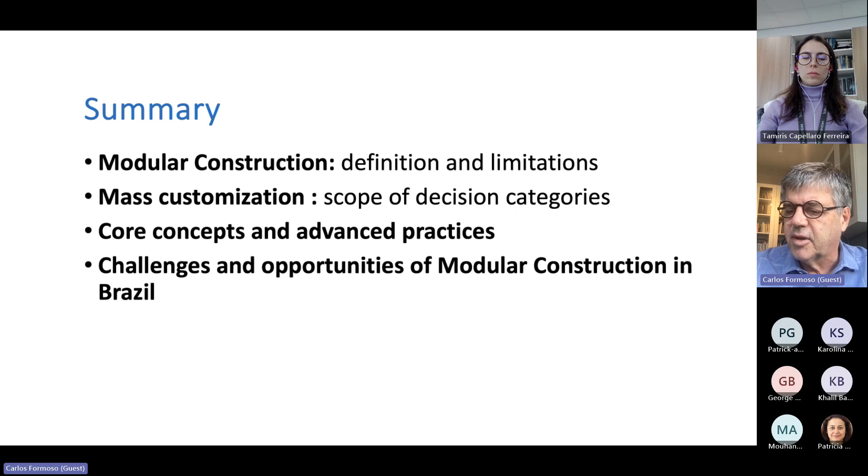So what is modular construction? Everybody thinks about volumetric modules that are fully produced in a manufacturing plant, right? A general definition of modular construction is that it's a construction process in which a large share of activities are executed off-site in a controlled environment with a high degree of mechanization.

Not only volumetric modules are considered as products of modular construction, but also panels that can be assembled on site. It's also stated that modular construction usually has a high degree of completeness before site assembly. One of the great advantages of modular construction is that the integration of components is undertaken in an industrial environment, and this is something critical when you do on-site construction.

The difficulties and problems in terms of coordination and quality arise when you need to integrate different components on a construction site where you don't have much control over processes. Of course, if we're talking about modular construction, the modularity concept should be used. Later on, I'm going to talk a little bit about this concept, which is very important for modular construction and needs to be adapted to be fully used in the construction industry.

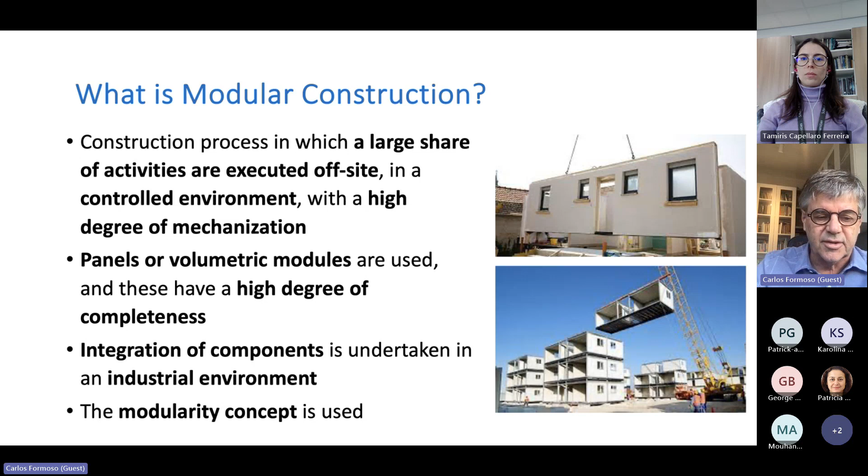Some limitations of modular construction: I have visited a number of modular construction companies in Brazil and also in the UK. What you usually see is that there is a variation in the degree of mechanization and automation. Some companies use a high degree of automation and mechanization, producing highly repetitive standardized modules, but other companies at the other extreme have a relatively low degree of mechanization.

I would say that even some successful modular construction companies produce modules in a manufacturing plant but without a high level of automation. Sometimes we say that some modular construction manufacturing plants look like a construction site with a roof, because many tasks are made by hand, not by machines.

Another interesting limitation is that the degree of completeness of modules produced in manufacturing plants also varies substantially. Even in developed countries, you see that in only some companies are a few subsystems assembled off-site. Some companies send parts to the construction site, and part of the work is assembled on site.

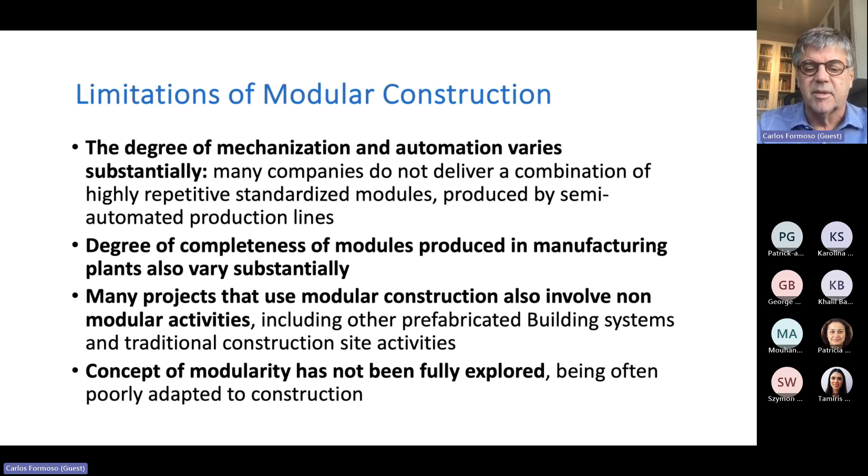Also, what we see in some modular construction companies is that the concept of modularity has not been fully explored, often being poorly adapted to construction. I'm going to talk a little bit about that later. These are some examples - in Brazil, we use a lot of wood frame and light steel frame.

These are two completely different companies. Tecverde is a wood frame company. They produce most activities in a manufacturing plant with a high degree of automation. It is a very successful company, one of the leading companies in Brazil.

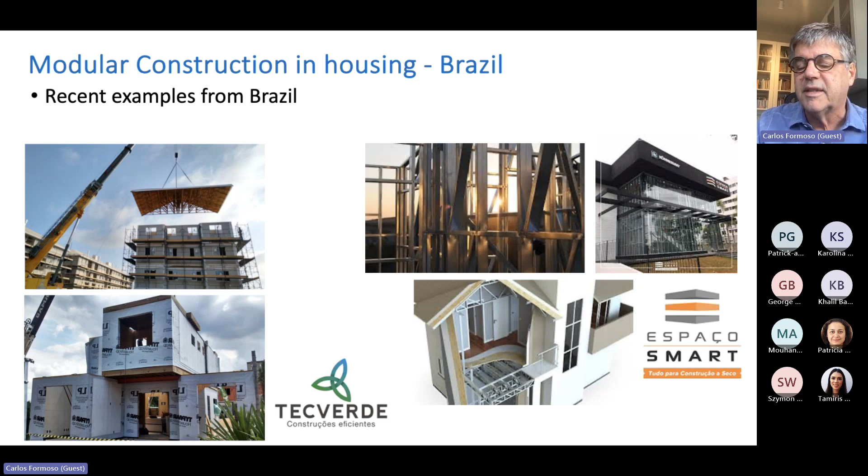The other company, Espaço Smart, doesn't send modules to the construction site. They send kits for light steel frame, roof, windows, and so on, assembled on site by qualified subcontractors. It's a kind of decentralized production system. They are also very successful. I would say they also offer modular construction, although the percentage of activities carried out in a manufacturing plant is relatively small. They operate across the whole country and even in other Latin American countries.

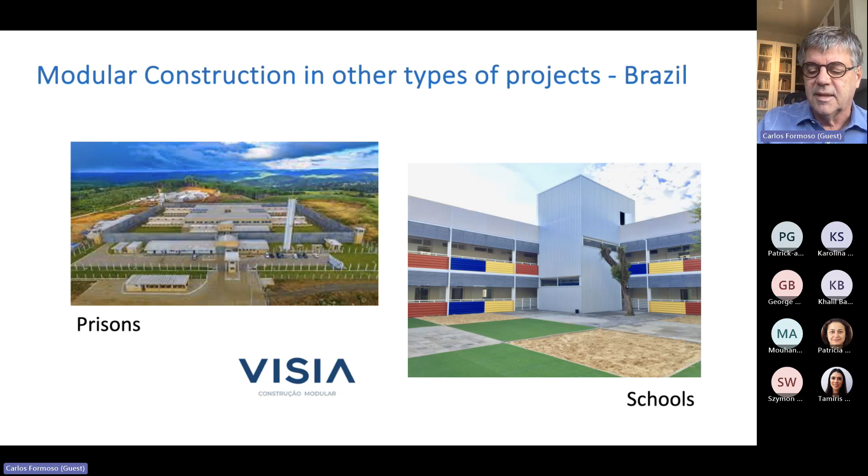This is another company. They produce a wide range of products, especially prisons and schools. I wish they could produce more schools than prisons, but prisons is one of their main businesses. This type of project usually has a very short lead time, which is one of the main advantages of modular construction around the world: delivering a project in a very short lead time.

Mass customization is something that has existed for a long time. It's when a company offers products that fulfill specific customer requirements through flexible processes and structures, within costs and delivery times similar to mass production, meaning you're able to provide some flexibility. You charge something for that, but not much more than mass-produced products. Many companies in the manufacturing sector adopt mass customization. They offer limited customization based on deep knowledge about customer requirements, based on the assumption that customers are prepared to pay a premium price for customization.

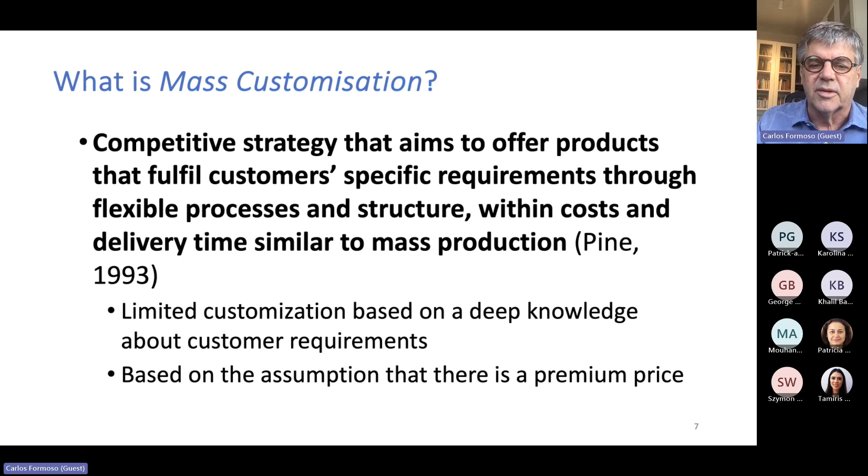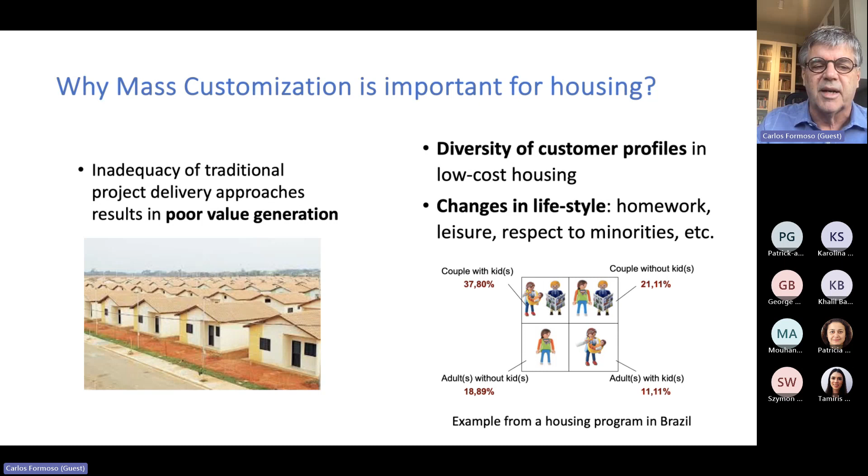So it's not about personalizing a product, doing anything the client wants, but having a limited range of changes you can make in the product. This is very important for housing. You can see on the left a very large social housing estate built in Brazil, which has very bad performance in terms of value generation, because this standard house probably isn't suitable for a large percentage of customers. Nowadays we have a high diversity of customer profiles in housing, so people have different requirements—there's a diversity of requirements. Mass customization allows you to improve value generation by offering the opportunity for some changes.

There is a discussion on how to achieve mass customization, and there are some simplified views about that. For instance, some people think you just create a menu so people can choose different components, different modules. Another alternative is you can print a building—print some components—but it's very difficult to do that for the whole building. Or you can use your creativity and do a very good flexible design. These views are simplifications of how you deliver mass customization. Mass customization is something much more complicated.

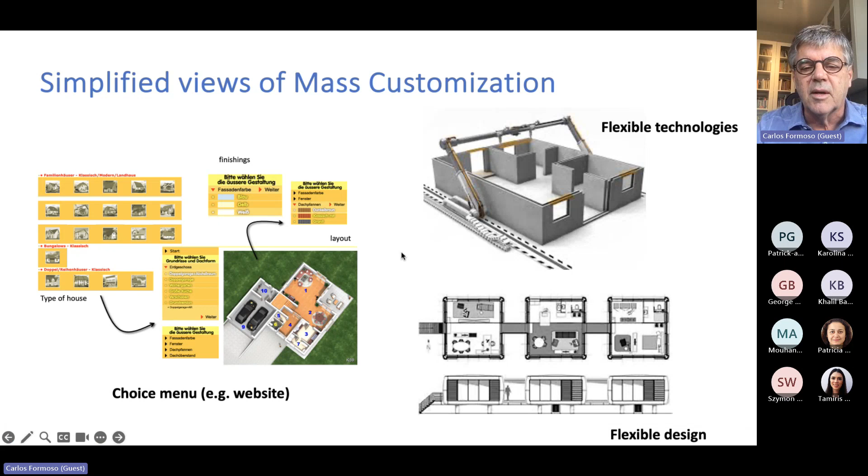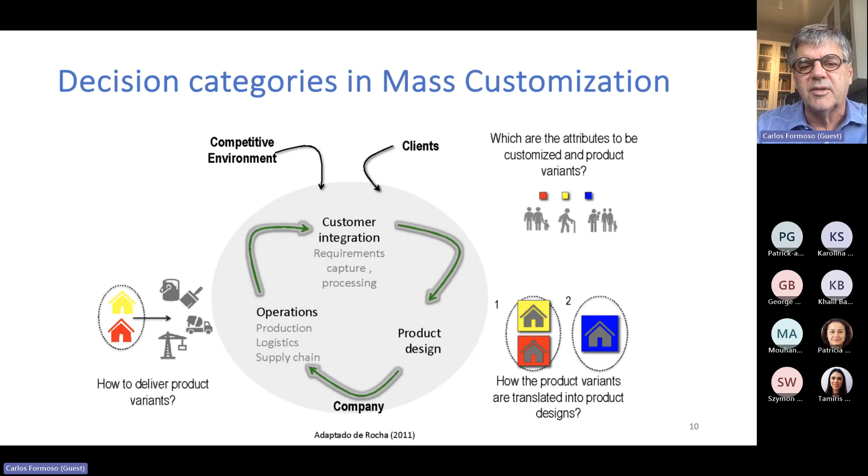You need to combine different types of knowledge to achieve mass customization. You must understand customer requirements—this is called customer integration, meaning creating mechanisms to consider customer requirements in the decision-making process. You need to design products that offer the possibilities for customization, and you also need to change the way you do production, logistics, and supply chain management. So there's a huge body of knowledge you need for mass customization.

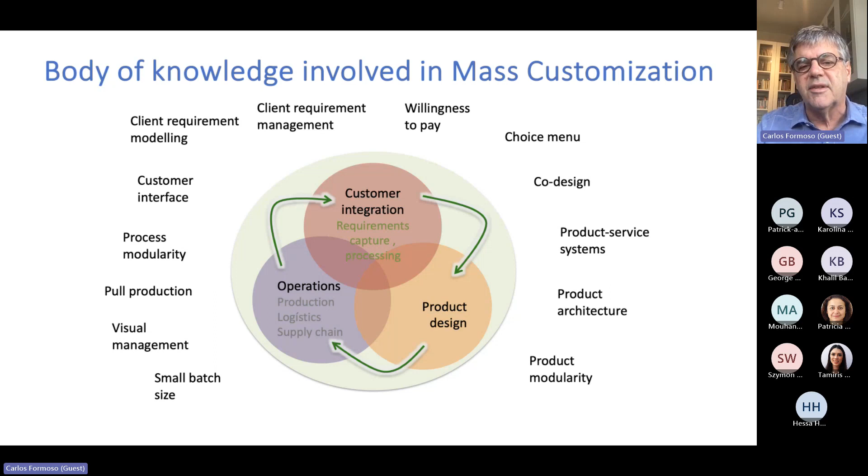I'm talking about mass customization because this is a very important concept for modular construction. Implementing mass customization involves a large number of concepts and methods. Some of these are related to the lean production philosophy, like pull production, visual management, small batch size. Some are related to the marketing field—how to model requirements, how to establish an interface for customers. And some are related to product development—product architecture, product modularity, product service systems. You need to combine those ideas to have an efficient and effective modular construction system that offers some degree of customization.

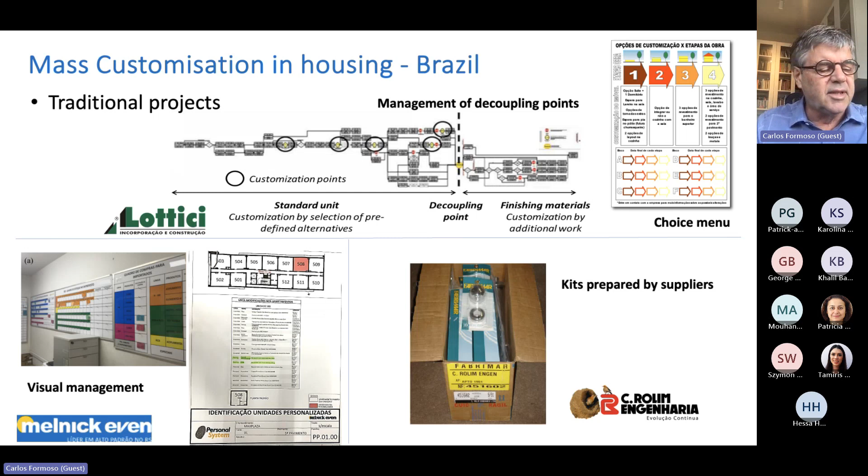When you talk about modular construction, the main reference is a group of five Japanese companies that are able to produce highly industrialized modular houses. At the same time, they are very good at capturing customer requirements. These companies are an important reference for modular construction in many other countries. Of course, other countries are also advanced in modular construction, but Japan is definitely a very important reference because they combine highly industrialized systems based on a deep knowledge of customer requirements.

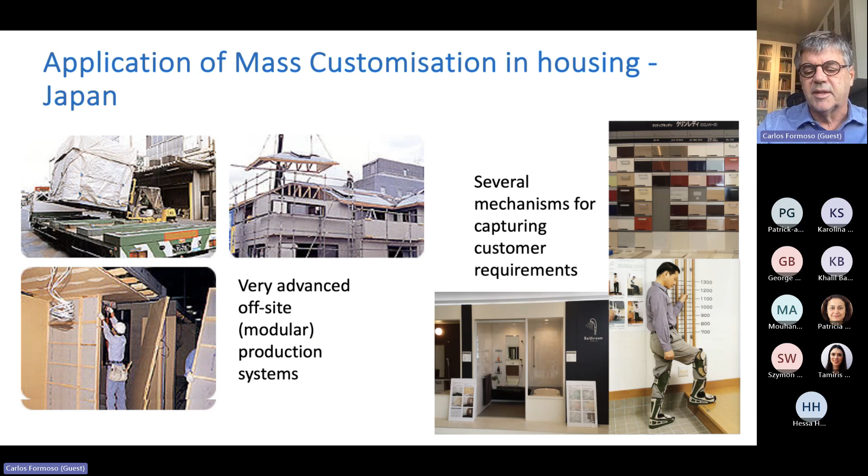Based on that, I'm going to talk about a number of concepts and practices that have been used in modular construction, classified in three categories: customer integration, operations management, and product design.

In terms of customer integration, these are pictures of companies that offer customers a kind of experience. They go to a place where they can choose different alternatives, test them, touch them, and this has been very important when they make a decision about the final design of the house. Some companies also offer a kind of choice menu that can be used to quickly arrive at a solution. This direct contact with the customer is very important.

Several companies in Japan do that. Also in Brazil, companies are starting to use that type of mechanism for involving customers in decision making, helping the customer to make a good decision.

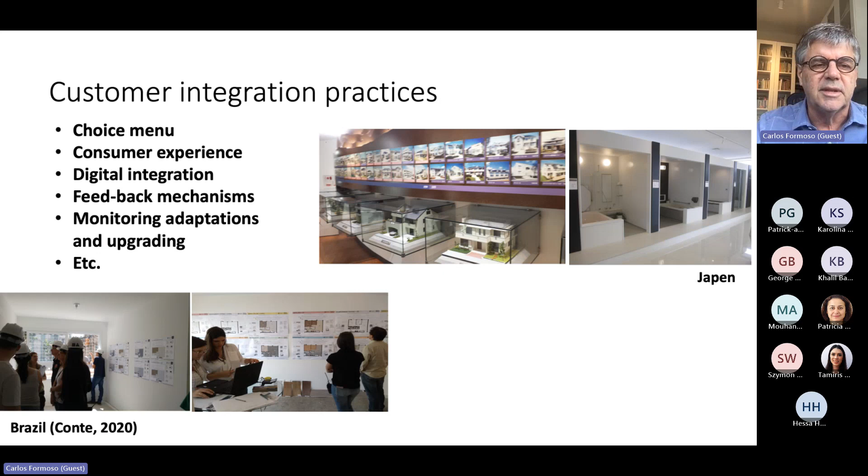This is very important. There are also some techniques for assessing customization options, used by companies before they develop their products. They want to know, for instance, how much the customer is willing to pay for a certain change in the product. So there is a kind of balance you need to do—you need to offer those product changes that are really something the customer wants. There are techniques like stated preference and choice menu that you can use to do that.

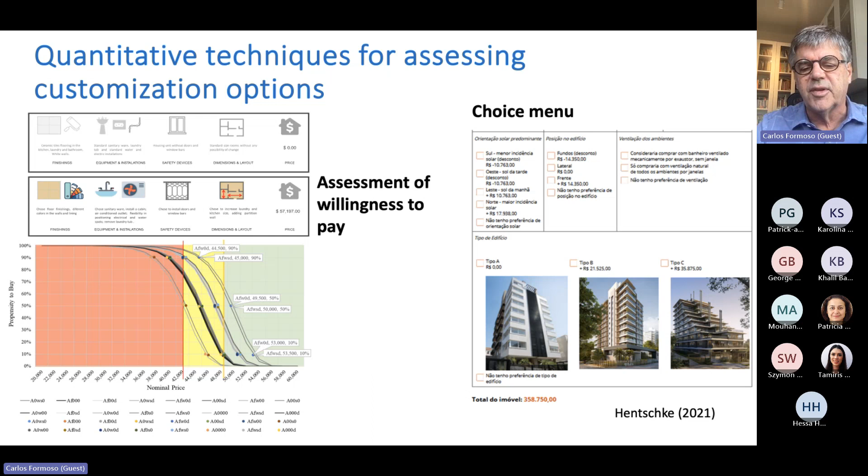Regarding product design, a very important change is product modularity. Product modularity is when you divide your product into subsystems which have different functions, and these subsystems are connected by standard interfaces. You can see many modular products in the market. Desktop computers are modular products—you can easily change components.

Cars can also be considered modular products. You can replace parts, at least some of them. Each subsystem has a different function, and there are standard interfaces that allow you some kind of flexibility for changing components. If a product has a high degree of modularity, it's called a modular architecture product. If it has a low degree of modularity, we call that an integral product.

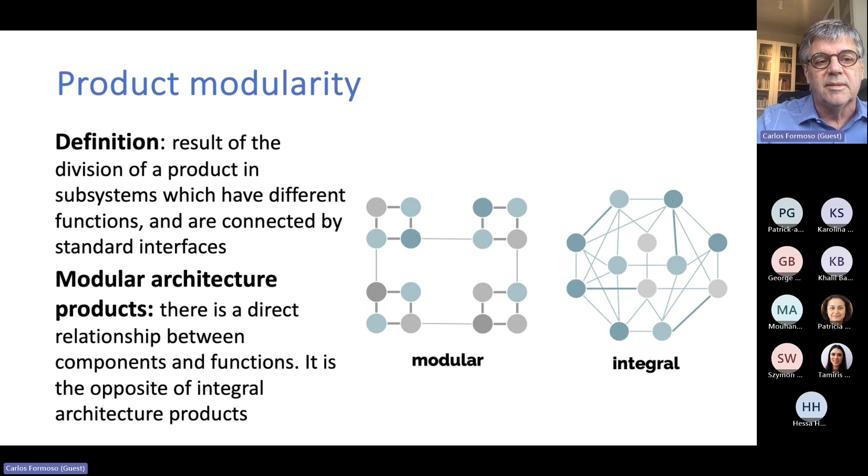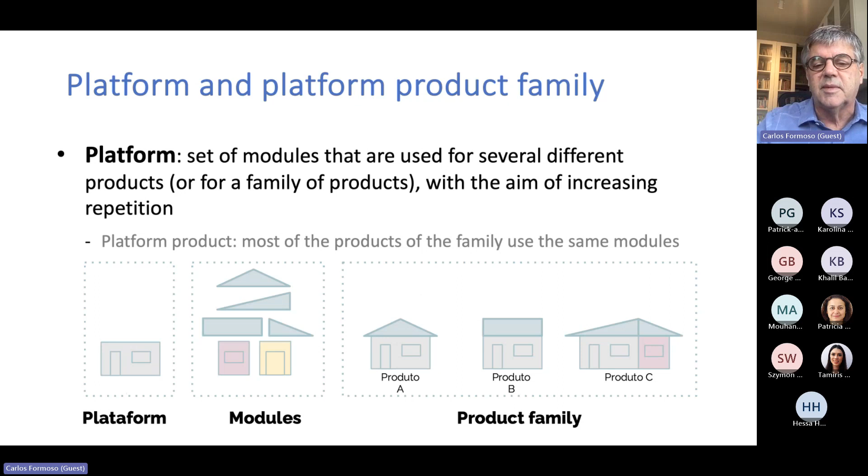A platform is a set of modules that are used by several different products that belong to the same family. That's the basic idea of product platform—it's a way of using the concept of modular construction.

For instance, some companies offer design catalogs, and many modular construction companies do that. You can open the catalog, you have different options, dozens or hundreds of options. It seems good to have many options, but this is complicated for the company because these products are very different, and if each customer chooses a different design, there will be a low degree of repetitiveness.

There is also something called burden of choice. If a huge home design catalog is offered to a customer, it's going to take a long time for the customer to choose the best design, and sometimes this customer would feel frustrated because he or she is not sure if the best choice was made.

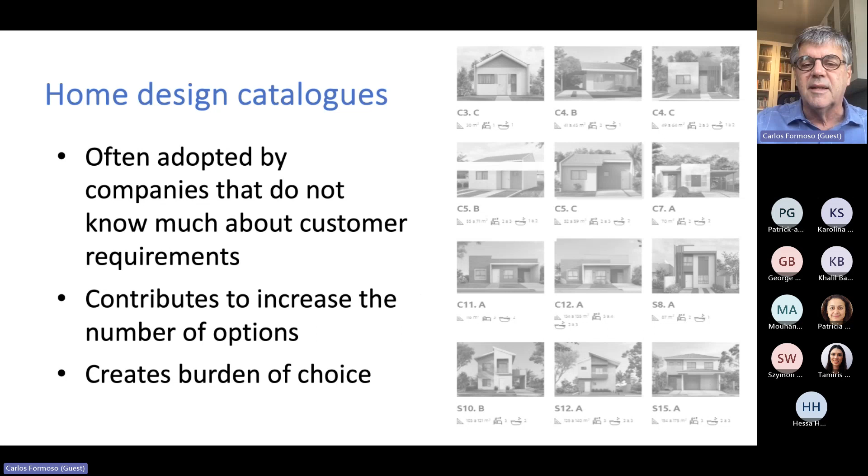So what's the idea? Let's offer modules. For instance, these are four designs from the same modular construction company. This was the work of one of our PhD students, Manuela Conti. What she did was identify common components from analyzing a group of houses, so this could become a platform.

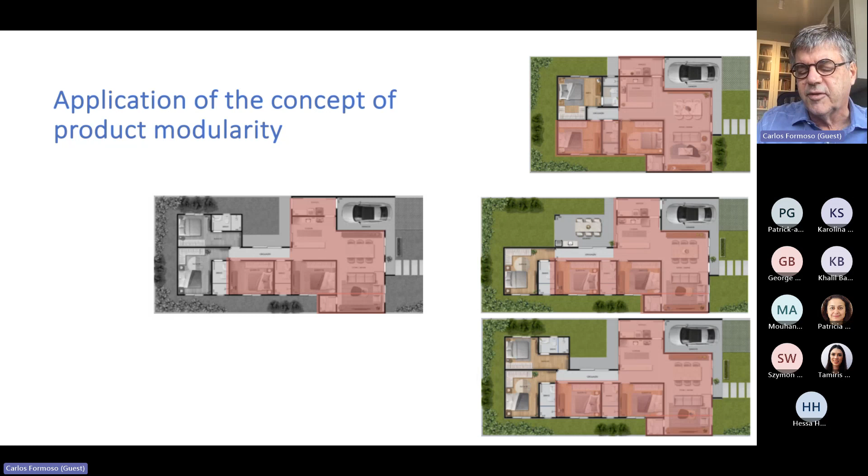So instead of offering dozens of house designs, you could offer a number of platforms—two or three platforms—and add some components. This is something very important for modular housing. It's not easy to implement.

Especially because we could analyze product modularity at different levels. For instance, you can have modularity when you produce a kit of components, when you produce a 3D module with or without finishing, or even when you talk about site assembly modules. So you can have modularity at different levels, which means you need to map how modularity is going to be offered. This is a kind of research topic for modular construction.

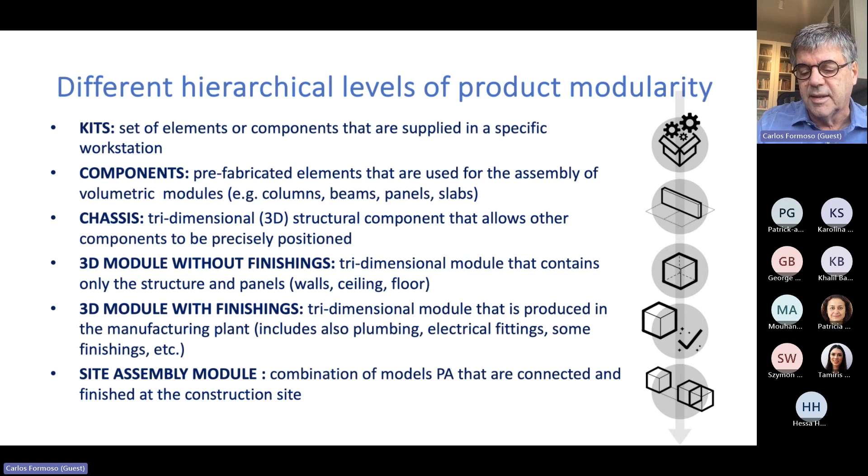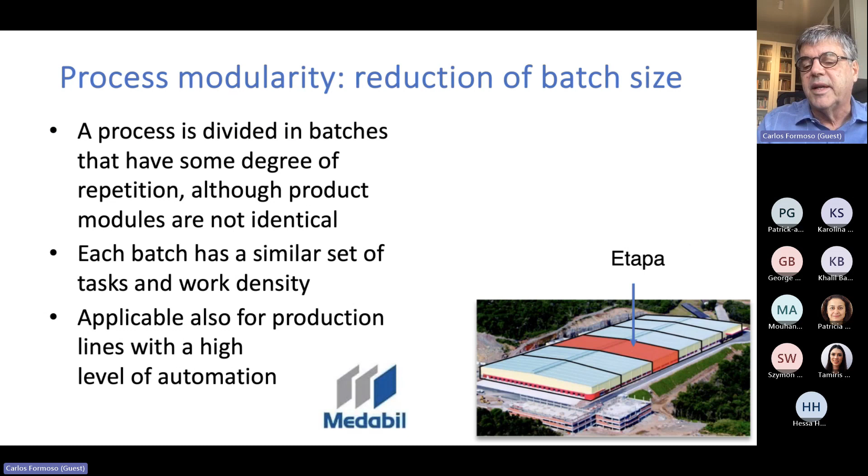Sometimes you cannot have modular products, but you can still have some kind of repetition if you use the concept of process modularity. Process modularity is very similar to the principle of reducing batch size, which is a lean production principle. This is when you divide a process into batches that have some degree of repetition, although the modules are not identical. Each batch has a similar set of tasks and work density. This is something you can use for industrial buildings, for instance, commercial buildings. It's a different type of modularity that can bring similar benefits to product modularity.

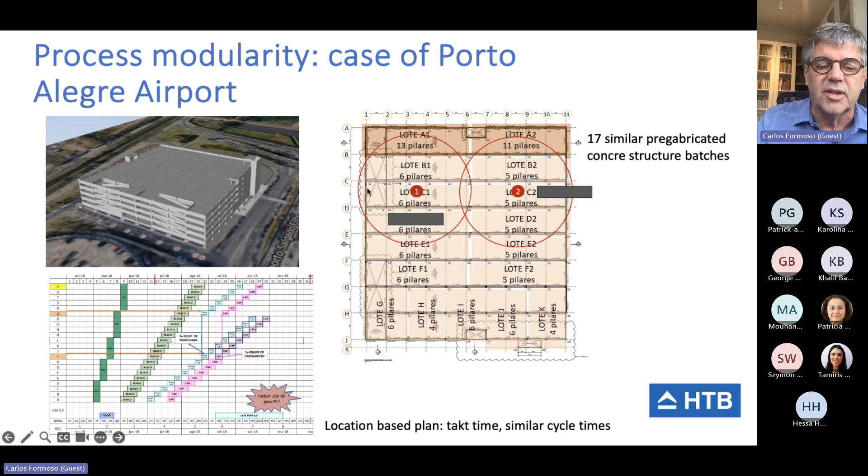This is one example, a parking building in Porto Alegre Airport. Porto Alegre is the city where I live. We applied the concept of process modularity, dividing this building into 17 modules, and then produced each module as a sequence. Although they were not repetitive, we established a pace, a rhythm for the production of this building, which was prefabricated.

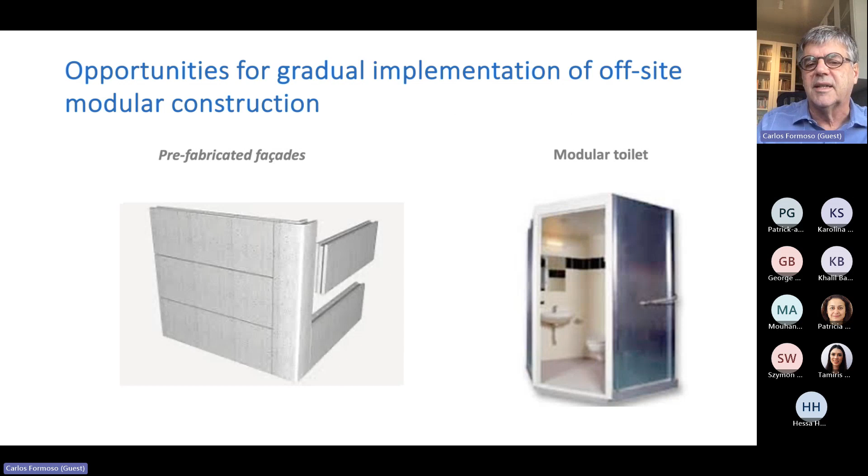Another option that must be mentioned, another movement that exists in Brazil, especially in the residential building market: some companies are trying to do a gradual implementation of off-site modular construction. Instead of bringing volumetric modules from a manufacturing plant, these companies are trying to bring some modular subsystems, like toilets, facades. Some companies are also using kits of electrical wiring, pipes, and so on. This is another movement, led by real estate companies.

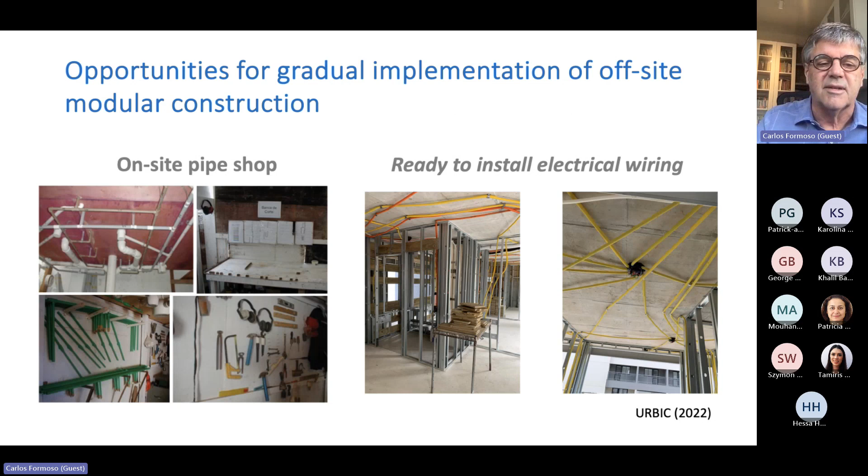The other movement, the modular construction movement, is mostly led by companies that have not previously worked in on-site construction. So these are companies that come from different sectors.

And finally, there are several concepts, methods, and techniques that come from the lean production philosophy that are very useful for modular construction. One of the planning techniques we're using for this type of project is location-based planning and control, an idea that is relatively old, from the 1940s. It used to be called line of balance, but it has evolved in recent years in the lean construction movement.

Nowadays there are a number of techniques we can use for planning, for working in small batches, coordinating the site assembly and the manufacturing plants, using some 4D modeling techniques to help in the planning process. There are many companies investing in that. Not many, but several modular construction companies are changing their managerial system so it's more suitable for modular construction.

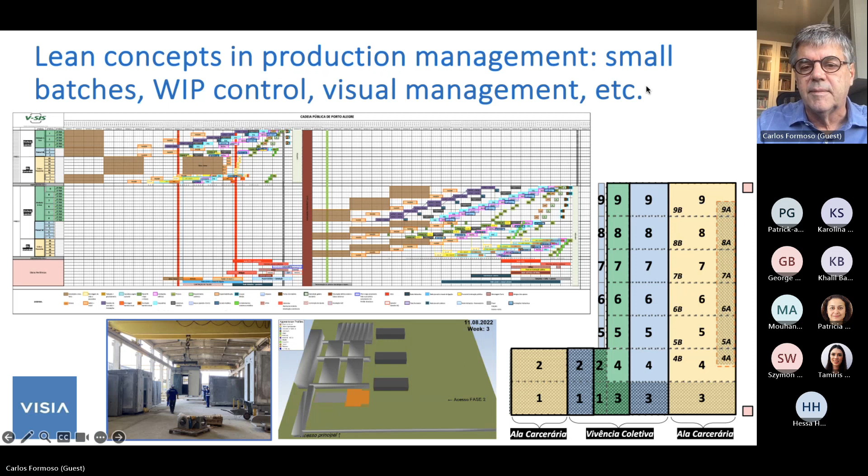These are some techniques we used, related to location-based control. We divide the site into zones. We establish flows, controlled by the rhythm, or what we call takt-time control, to see if the rhythm is followed. We also control cycle time and adherence to batches. There are a number of location-based control techniques that are also very useful for modular construction.

One key idea in modular construction: you cannot have a lot of work in progress. You don't have space to store modules. They are heavy, they are difficult to move. So you need to minimize that. This is quite important.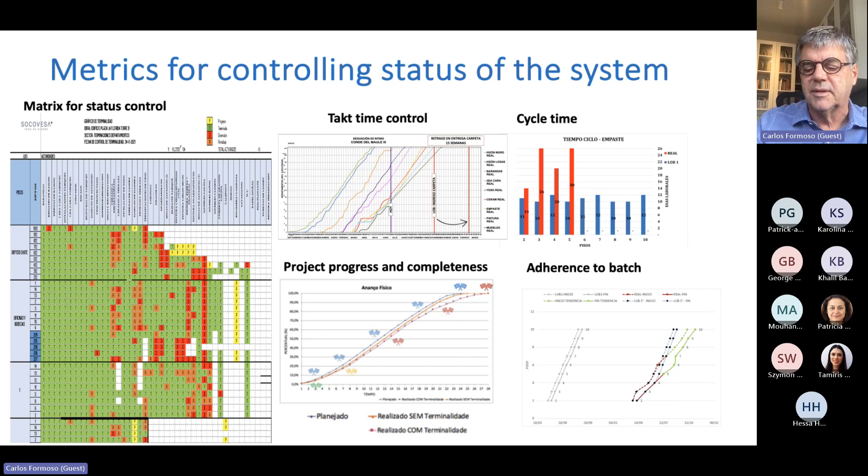For this integrated management of manufacturing plants and site assembly, you can use different digital technologies that allow you to keep construction sites connected to the manufacturing plant, so the production of modules, the delivery of modules to the construction site, can be adjusted depending on how site assembly evolves.

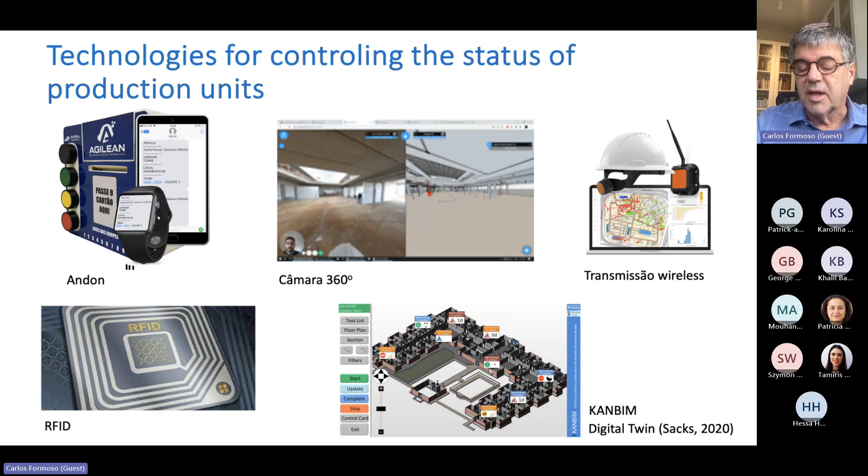Some final comments. I'd like to emphasize that there are major changes happening in the construction industry. There is a different type of industrialization, which is not based, as it used to be in the past, on standardization, off-site production, and mechanization. It involves several other things, for instance, the use of digital technologies, the integration of supply chains, new business models. So it's a different type of industrialization that is happening.

One important thing is not to repeat mistakes that the construction industry has made in the past, focusing on technological solutions without improving managerial models. You need to manage projects in a different way. The lean production philosophy and the use of digital technologies play key roles in the management of modular construction.

Another key challenge is to understand the diversity in client demands. You need to consider different client requirements in order to really have success in a specific market segment. This is applicable to the residential building market, but also to other types of buildings, schools, prisons, and so on. These are some of the ideas strongly related to customers: customize products, reduce lead times, offer a combination of products and services. So there is a wide range of changes happening in the construction industry.